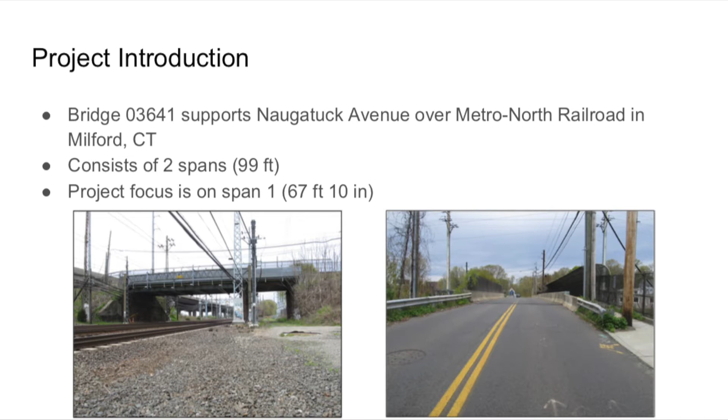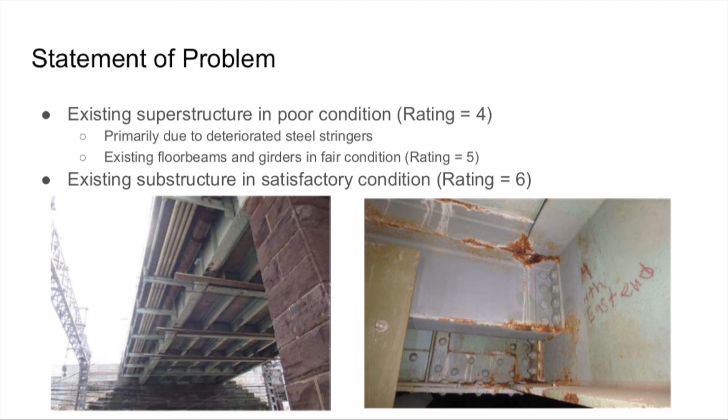Bridge 03641 supports Naugatuck Avenue over Metro North Railroad in Milford, Connecticut, consisting of two spans, which total a length of 99 feet. However, the project focus will be on span 1 of the bridge. According to a fracture critical and routine inspection taken in January 2021 of Bridge 03641, the existing superstructure is considered to be in poor condition, primarily due to deteriorated steel stringers. However, existing floor beams and girders are considered to be in fair condition, and the existing substructure is in satisfactory condition.

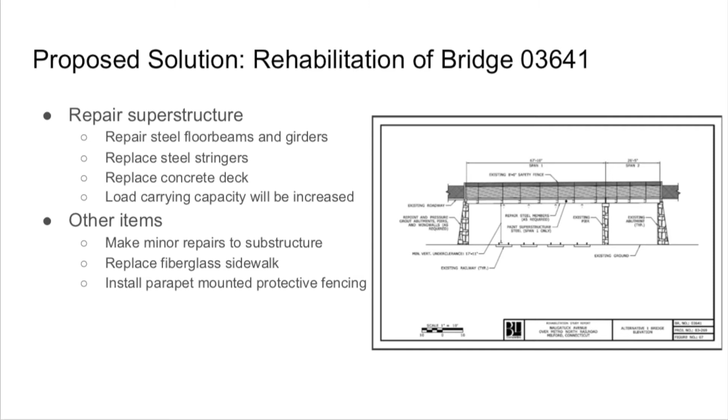The proposed solution to the rehabilitation of Bridge 03641 includes two major sections: the repairs to the superstructure and other minor items. The other minor items do not gain the full attention in this project as they are mostly industry standards. Stringer Design and Analysis by Matthew Wenlin and Franklin Vasquez.

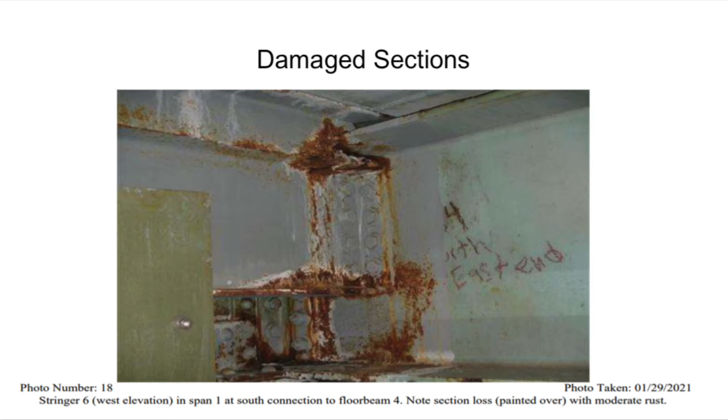A large portion of this project revolves around repairing and replacing certain portions of the steel superstructure. Over time, these steel members experience damage due to weathering and rust, resulting in several areas of section and webbing loss, as shown. Part of our response to this is to repair and repaint the damaged floor beams and girders as needed. Additionally, the damaged stringers will be replaced with stronger 50 ksi steel members. The capacity of these members and the bolted connections are verified through manual calculation and through software modeling. With these measures, we extend the lifetime of the superstructure and increase its load-bearing capacity.

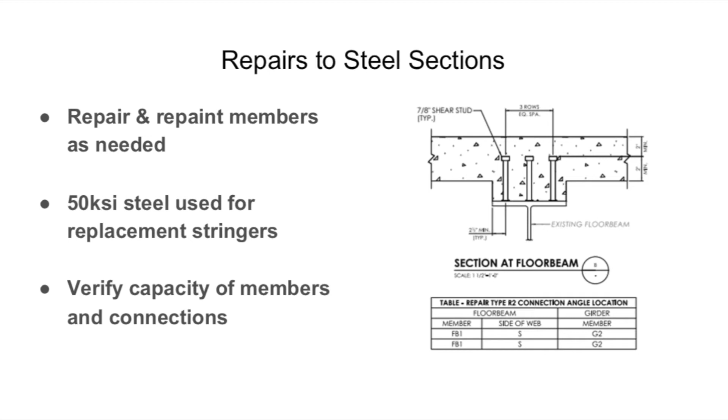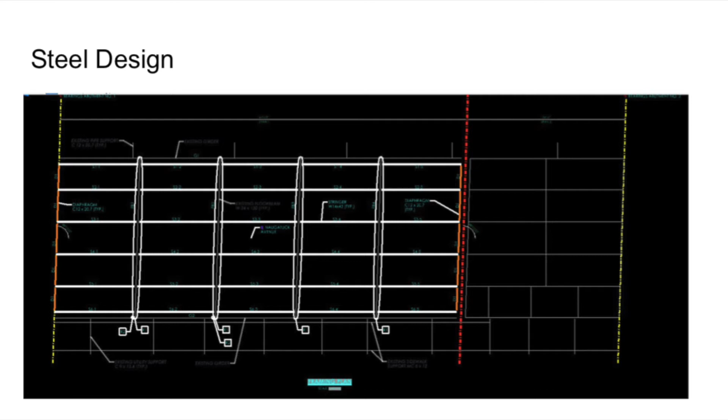The design of the steel members of Bridge 03641 were drafted in MicroStation. The framing plan is shown. The load path is as follows. The live load is applied to the concrete deck, which is supported by the steel stringers which run parallel to Naugatuck Avenue. That load from the stringers is then transferred to the floor beams which run perpendicular to the road. That load is then applied and transferred to the end girders which run parallel to Naugatuck Avenue. Girders then transfer the load to the substructure, which consists of the two abutments and the one pier.

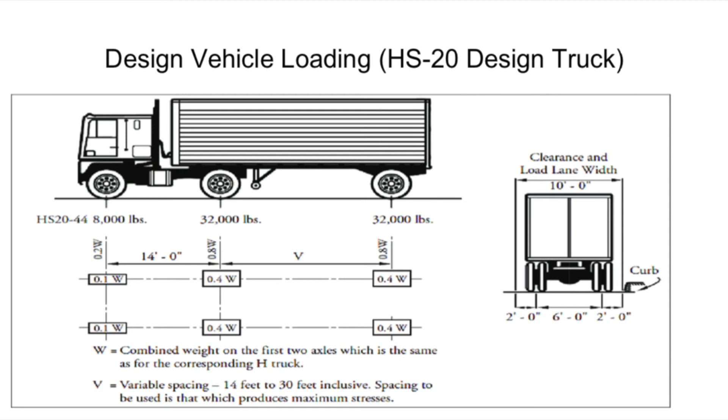The design vehicle used for calculating the demand of the stringers is the HS-20 design truck. The diagram shown includes the loads applied by each axle. To analyze the stringers, the demand was applied to the stringers in SAP 2000. The loads considered include the dead load and the live load. To compute the live load, we considered factors such as the dynamic factor and the distribution factor. The demand was found to equal 55.179 kips.

Table 7.1 in the Steel Construction Manual, along with some manual calculations, were used to find the capacity of the stringers at the connections. The connections consist of 4 A325 bolts. The capacity of the 4 bolts was found to equal 97.36 kips. This means that the capacity is greater than the demand, and therefore the structure can withstand the applied load.

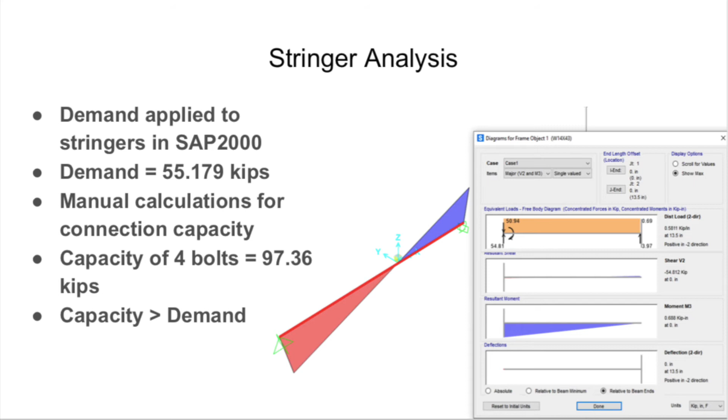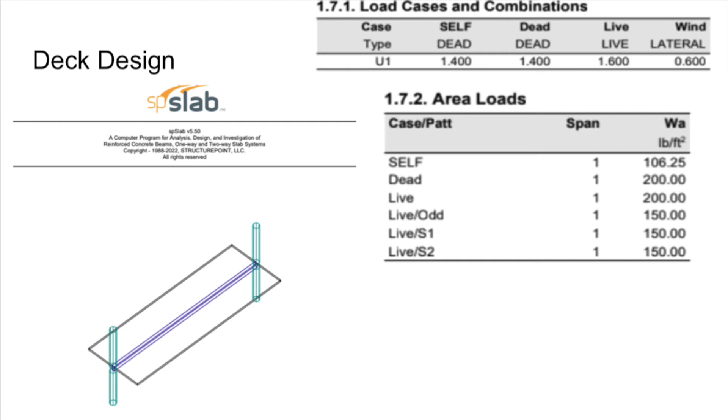Deck Design and Analysis by Jacob Vidiera and Fu Tan. The team decided that using spSlab would be the most appropriate tool for the deck design, as it is a concrete deck. Here we can see a bunch of information solved for from spSlab that will be used for the bearing capacity calculations later down the line. For the analysis of the applied loads, we see that a giant applied load is spread over the entirety of the deck, which makes sense as it is a very long deck.

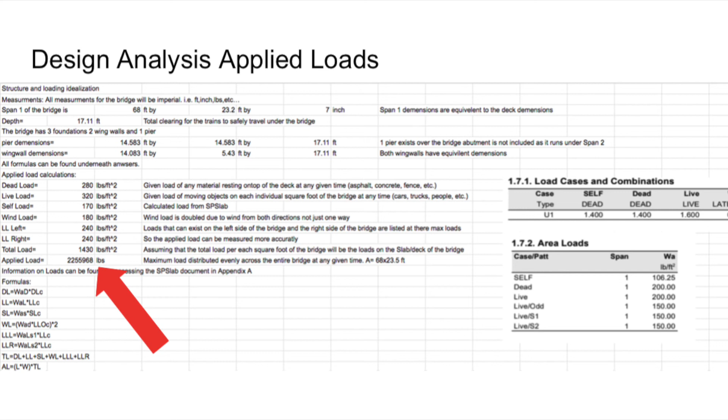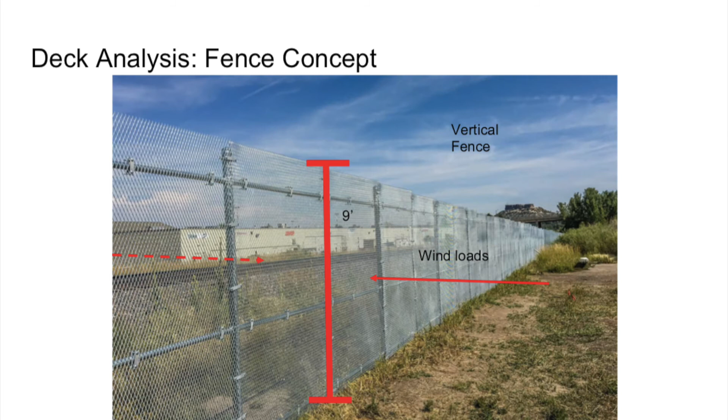For the deck analysis, we can also see that number 5 and 6 bars must be used to reinforce the deck so it doesn't collapse. For the deck analysis of the fence, we see that a 9-foot vertical fence is needed to comply with CTDOT BDM codes. For the deck analysis fence calculations, we see that it is preferable to use tension bars 4 feet apart from one another to reduce the amount of wind loads applied to either side.

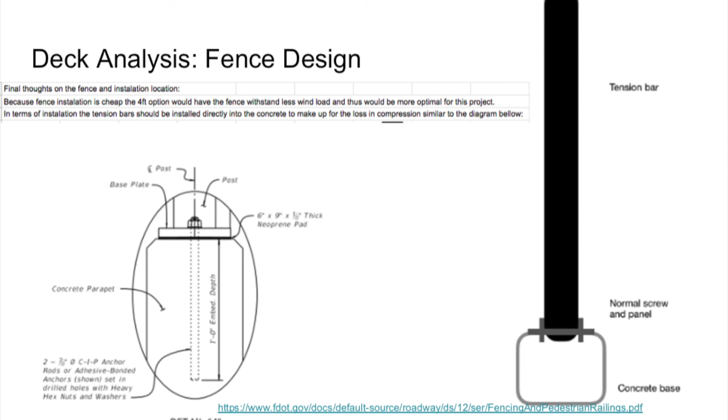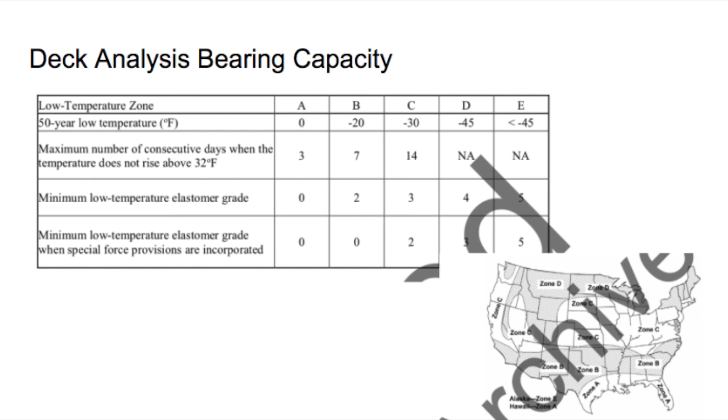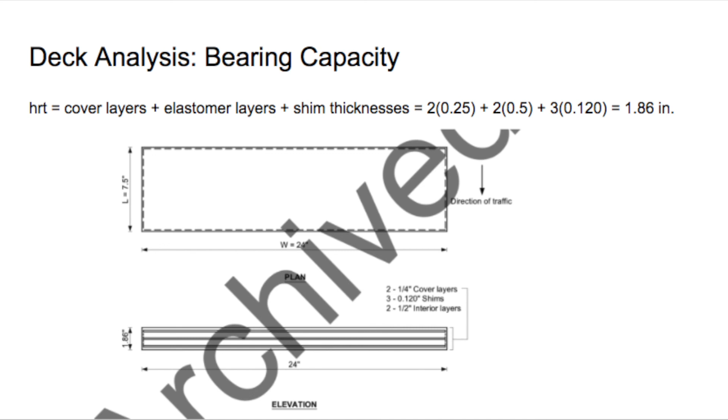Hi, this is Fu Tan. So my part of our bridge is the design of bearings, and I'm focused on the design of reinforced elastomeric bearings. And the first is about the influence of low temperature zones and the minimum grade of the elastomer. Secondly, I'm doing the calculation about the design of bearings, and first I calculate the total height of the bearing HRT. Another one is a shear key between the bent cap and the diaphragm.

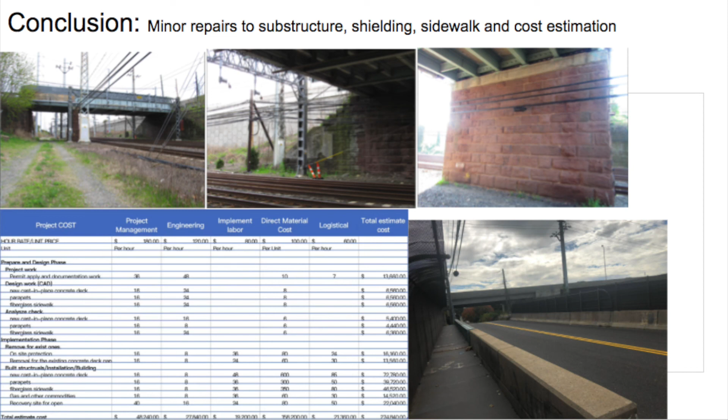What should also be mentioned is that minor repairs need to be made over the substructure of the project, as well as repairs to the railroad shielding that will be used during the construction process, a new fiberglass sidewalk, and a full cost estimation that is developed that you can see in the bottom left hand corner.